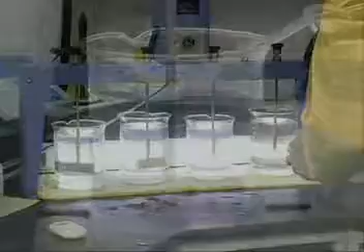Water treatment plant operators work diligently to produce water that is safe, clean, and suitable for consumption 24 hours a day, 7 days a week, 52 weeks per year. Treatment plant operators use a variety of techniques and methods to provide an uninterrupted supply of potable water for their

family, friends, and neighbors. How is it then that a 60-year-old resident in an Alabama city has his skin blistered by a strong caustic solution while taking a shower in his home? Or kidney dialysis patients inadvertently receive water mixed with ethylene glycol, an antifreeze additive, resulting in 2 deaths and others being sickened. Or chlordane, used as an insecticide, is drawn into a water distribution system throughout a neighborhood.

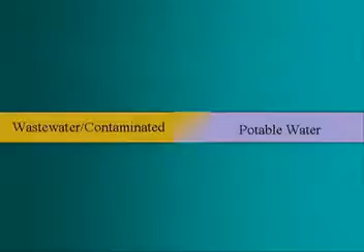Or a dozen children at a vacation Bible school experience dizziness and nausea because they are served Kool-Aid laced with chlordane. Each of these episodes is a real-life example of a cross-connection backflow incident. Cross-connection is an interconnection, either direct or indirect, through which the potable water supply is exposed to a non-potable source of contamination or pollution. Backflow is a flow condition induced by a differential in pressure that causes the flow of unwanted substances into the potable water supply system.

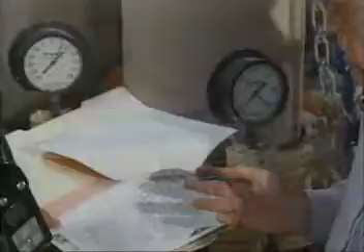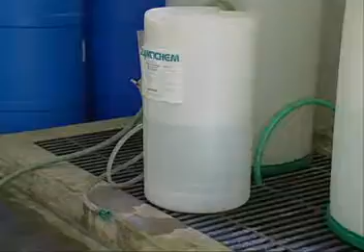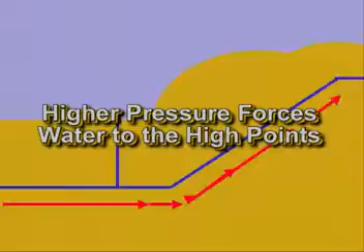Backflow can be caused by either back siphonage or back pressure. A back siphonage can arise from a main break. For example, a driver inadvertently runs into a fire hydrant, knocking it off the base. The hydrant is located in a low spot in the distribution system. The normal situation in a distribution system is the higher pressure in the lower elevations forces the water up to the higher points. Once the hydrant is severed, the pressure drops suddenly, and the water flows from the higher elevations

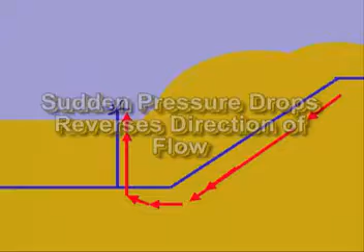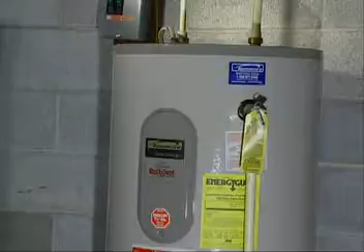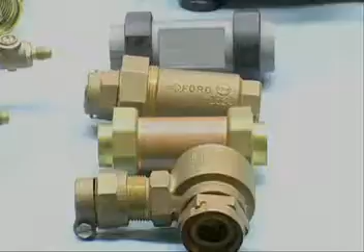to the lower point. In addition to the dirty water created by the reverse direction, the retreating water may actually create a siphon effect, drawing unwanted substances into the system wherever they may be connected with the water supply. A back pressure situation can develop from excess pressure generated in a hot water heater. As water is heated, it expands, creating pressure in the process. Once again, the water will flow from the area of higher pressure to the lower pressure. If there is not a device in place to prevent the disruption in flow, the customers of a water supply system may be exposed to potentially harmful substances within their water supply.

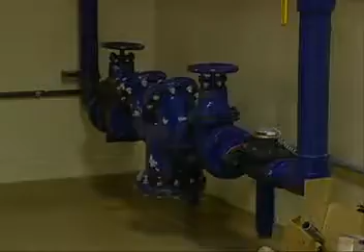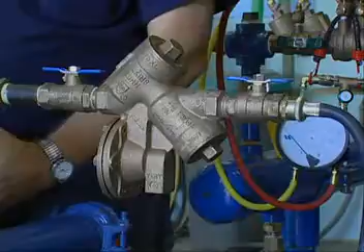The need for a cross-connection control program may take many of your customers by surprise. Another issue in the cross-connection arena is the cost. A significant portion of the cost of a program is usually passed on to the customers. Prices vary from the relatively inexpensive residential device to several thousands of dollars for installation in larger, more critical applications. In addition, some devices will require annual inspections and ongoing maintenance expenses beyond the initial costs. For this reason, it is essential for the water companies to begin a public education and awareness campaign, informing their customers of the need for such a program.

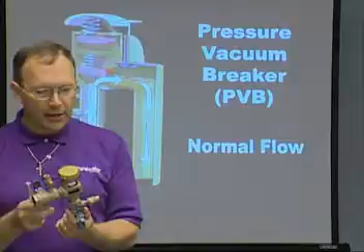Some of the methods of getting the information out are public information announcements on local television and radio stations, and newspaper press releases from time to time. All of the utility representatives who will be interacting with the public should have a good understanding of the importance of the program, the scope of the project, including timetable for implementation, costs of the various options used in cross-connection, the inspection frequency, and the procedure to be taken in cases of non-compliance.

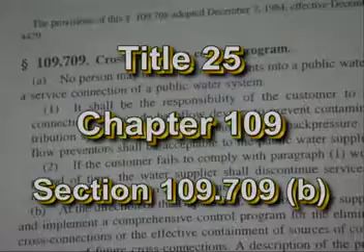The Department of Environmental Protection is authorized under the Pennsylvania Safe Drinking Water Act to establish standards for the construction of a water supply to assure compliance with the provisions of the Act. Accordingly, Section 109.608 of DEP's Rules and Regulations requires that a water supply may not be designed or constructed in a manner which creates a cross-connection. In addition, Section 109.709B further requires that, at the direction of the Department, the public water system shall develop and implement a comprehensive control program for the elimination of existing cross-connections. Individual water suppliers may need to adopt a local ordinance.

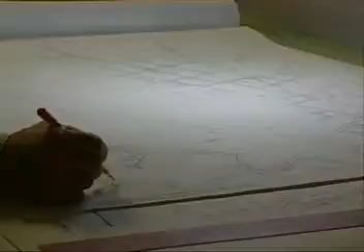The water supplier should do a survey of their system as soon as possible. The idea is to identify those facilities that pose the greatest hazard in the most vulnerable sections of their system. One method to accomplish this is to divide the customer base into 3 groups: hazardous facilities, aesthetically objectionable facilities, and non-hazardous facilities. Then, review the distribution system records and maps to identify areas of chronic low pressure and frequent main breaks. Combining those 2 categories can provide a rank to list areas of concern. The first priority would be the hazardous facilities in the most vulnerable sections of your distribution system.

The second priority would be the hazardous facilities in the less dangerous areas of your system. Third would be the aesthetically displeasing sites in the hazardous area, etc.

The next step is to notify those customers in the highest priority of the requirement for control. The notification could be in written form and followed by a face-to-face meeting. All parties should be clear on the timetable for completion and the type of device to be installed.

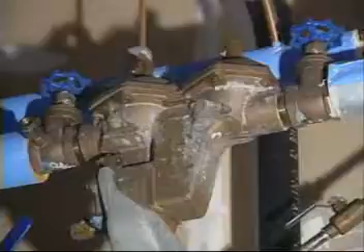Once again, the device must match the potential for hazard. A simple double check valve is not suitable for application where a toxic contaminant could get into the water supply. We have mentioned backflow prevention devices at various points throughout this video.

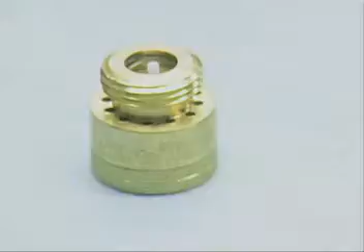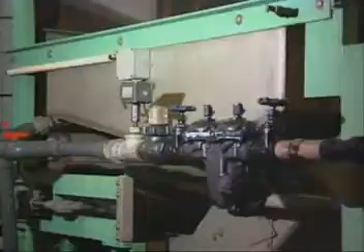The backflow prevention devices are various mechanical plumbing arrangements designed to prevent backflow and back siphonage from occurring. They range from simple, straightforward to the complex multi-barrier types, and they vary in effectiveness as well. In selecting devices to be used in various applications, keep in mind that it is vital to match the degree of protection to the degree of hazard present.

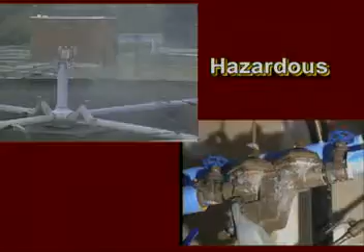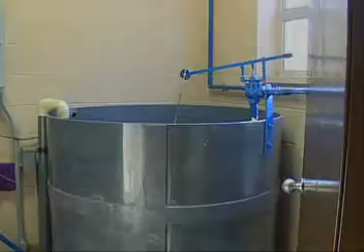It is also important that the limitations of each device be understood, since the degree of protection provided will depend on the type of protection device chosen and the maintenance program employed. Some backflow prevention devices used for cross-connection control are the air gap. This is the safest, surest way to avoid cross-connections.

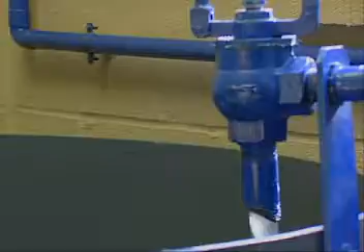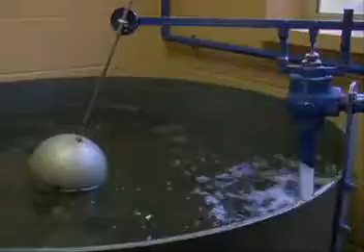An air gap is a physical separation between the water supply and the contaminant. Here it is the distance from the highest possible level in the sink and the tip of the faucet. The recommended distance for the air gap is double the diameter of the pipe delivering the water. In no case should the air gap be less than 1 inch.

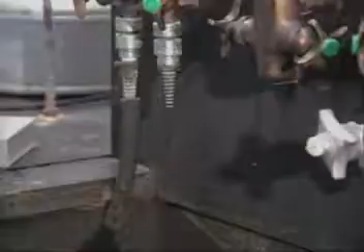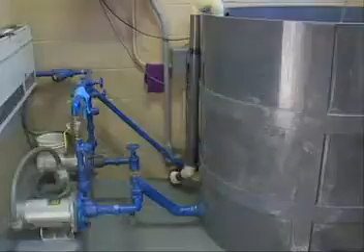The operator also needs to ensure that safety is not compromised by carelessly adding a length of hose or some other apparatus which defeats the purpose of the air gap. A major drawback to an air gap is a loss of system pressure. Because there is a loss of system pressure with the air gap, the cost of reinstituting pressure by overhead tanks or installing a tank and pumps may be prohibitive.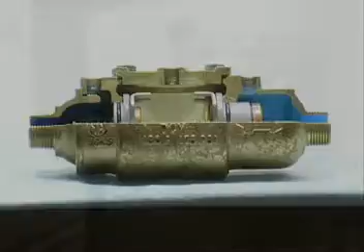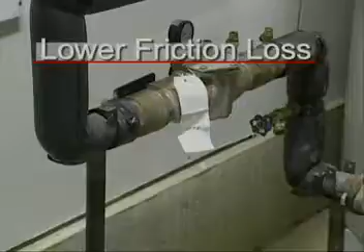Double check valve assembly consists of 2 independently acting, soft-seated, spring-loaded check valves mounted in series with 2 tightly closing shutoff valves and 4 test ports. The primary advantage of a double check valve assembly is that when the 2 check valves are wide open, there is relatively little resistance to flow. They prevent backflow by both back pressure and back siphonage.

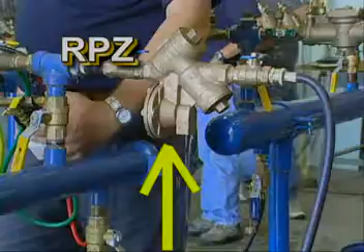Because the double check valve assemblies lack the differential pressure relief valve that reduced pressure zone devices have, they are recommended only for non-health hazards. They also could fail to function while not giving any outward indication that failure has occurred.

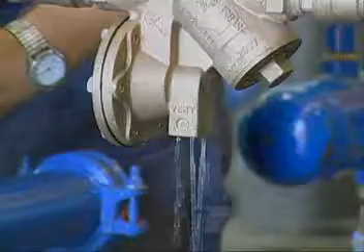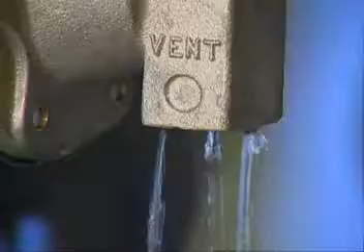Reduced pressure zone devices consist of two soft-seated, spring-loaded check valves operating in series and a soft-seated, spring-loaded, diaphragm-activated pressure differential relief valve located between the check valves. These devices will indicate leakage through one or both check valves or the relief valve by the discharge of water from the relief valve port. This is an important advantage over the double check valve assembly.

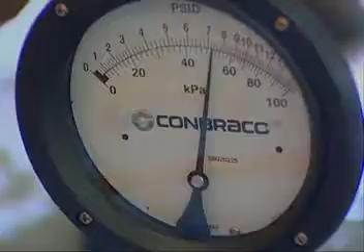This device is recommended for hazardous materials that present health risks. One of the drawbacks is a significant loss of pressure across the device. The pressure drop may range from 10 to 30 psi, depending on the size of the apparatus and the flow rate.

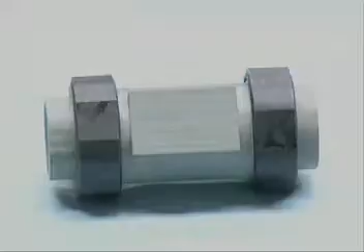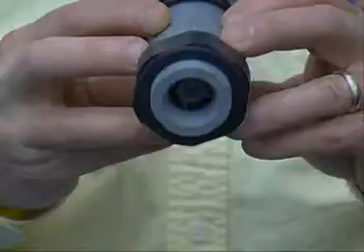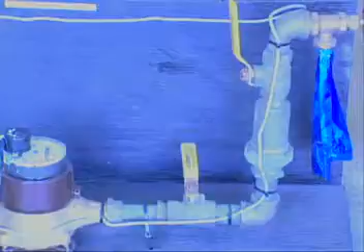The residential dual check valve is a practical, non-testable device that can be installed for containment protection at residential homes. Because it cannot be tested, the residential dual check valves are recommended for non-hazard applications. The RDCV is installed in line and downstream of the service meter and contains no shutoff valves.

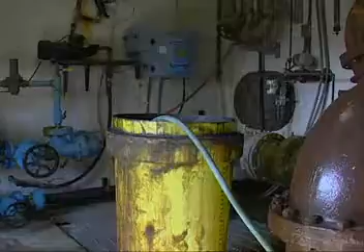In summary, a comprehensive backflow prevention program is not only required by regulation, it is the right thing to do. Every water system is susceptible to a backflow incident, and backflow episodes can be costly in terms of life and health, both financially and legally. Every system should institute a backflow program if they haven't already done so.

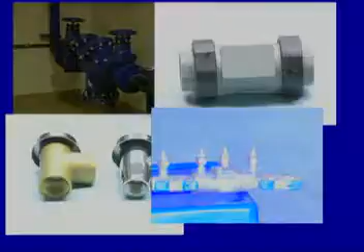When reviewing and approving proposals for backflow prevention devices, ensure that the proper device is specified to match the degree of hazard and that the monitoring and maintenance programs are appropriate and ongoing. For more information on cross-connection backflow prevention, systems can contact their local sanitarian or public health department.

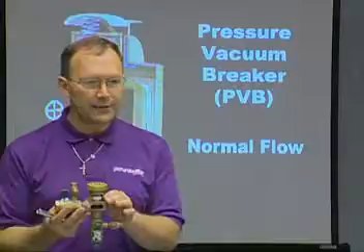Help in developing a cross-connection program is also available from various organizations, such as the Pennsylvania Rural Water Association, the American Backflow Prevention Association, and the New England Water Works Association. A well-thought-out and properly implemented backflow prevention program will go a long way in preserving the quality and safety of the best drink in town.